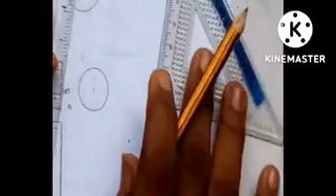So good. Now the next thing to do is to make use of the set squares. Okay, or let's just use the normal method: up and down, up, left and right, top, bottom, right, left. So now we'll join these divisions.

We join them. It's not necessary, as I mentioned in the previous episode, but it is good, so you can know where you're coming from and where you're going. And it also assures you of your accuracy, because once they pass through the center, you will know that it is correct.

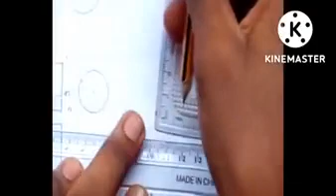The next thing to do is to draw the front elevation. So I'll be drawing the front elevation now. This is how the front elevation looks. So the front elevation will actually also look like a rectangle, even for the development of an untruncated cylinder.

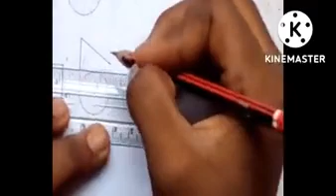So this will be the top. In this case we have truncated it, right? So it will no longer be a rectangle. So let me truncate from this point to this point. Instead of starting from the top, let's start from a point that is not at the top, so that you know that it doesn't have to be from the top. But once it's not at the top, you have a new top. So this was the original top, but we didn't pass through that side. So let me draw the other points.

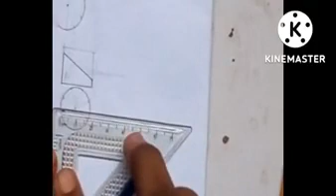This was the original cylinder, but when you truncated it from this side to this side, you have a new cylinder. The next thing to do is to project your lines. So project the lines on the section on the plan to the top. We have here. We have them here finally.

So we'll now project these lines to the right. They will be the ones used for the development of the truncated cylinder. There we go. So this is the center line. Now this might look like a very tiny drawing, but I intentionally made it tiny so that it would fit into this part.

Now the next thing to do is to cut your divisions. So you are going to mark the divisions. You can say mark, you can also say cut, either one. So I'm going to mark the divisions from the plan onto the development. So let me start.

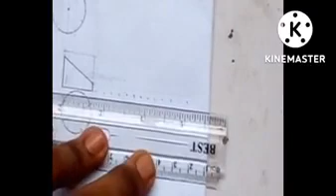The next thing to do is to draw a vertical line that will correspond with the height of each of these points. So they are kind of the sections of the front elevation. So basically this procedure is just the process of dividing the front elevation into sections and then drawing the shape of each of those sections. The reason is that when you draw the shape of the smaller sections, you will be able to get the aggregate shape of the entire development. Because you can't get it all at once, you have to divide the section.

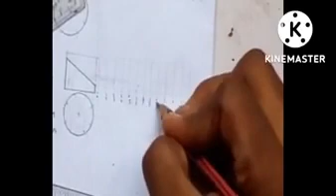So now from this section, let's call it 1, 2, 3, 4, 5, 6, 7, 8, 9, 10, 11, 12, and then back to number 1. So let's name them here: 1, 2, 3, 4, 5, 6, 7, 8, 9, 10, 11, 12, back to 1. Now from 1 to 2, at number 1 we have the height here, so point it here. At number 2, we have the height at this level, so we'll transfer it and then point it at number 2.

At number 3 on the plan, we have the height at this level, we'll transfer it to number 3 on the development. At number 4, we have the height at this level, we'll transfer it to number 4. At number 5, we'll transfer it to number 5. At number 6, we'll transfer it to number 6. Then at number 7, we have it at the lowest level of the truncation. 7, good. Then number 8.

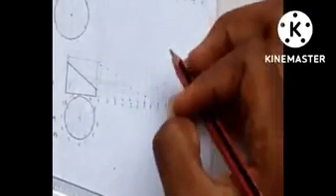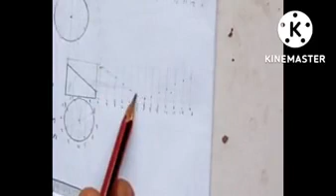So you can see that this pattern also repeats. So instead of stressing yourself, you can just copy the pattern from each dot to the other. And finally, we get back to 1. The next thing for you to do is to join all these points with your French curve. I'll first line it with my hand, that's my practice. I always draw a faint line through all these points with your pencil, freestyle.

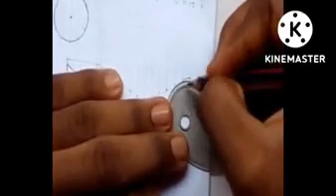Then after you're done with that, you can now use your French curve to line everything in. This is not a very difficult one because these ones are actually small. But just line smaller sections first. So that's what I'm doing here. I have this one here. This one here. Then let's draw the middle section, the connection.

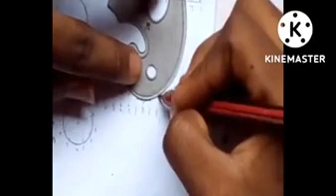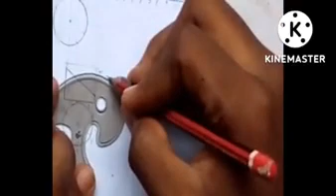Then we have this. We have this here. Then we have this here. We have this here. There is actually a trick involved in this though. I discovered that when you draw up and down sides of the French curve, it gives a smooth curve. But we'll talk about that in another episode. Let's just focus on the development.

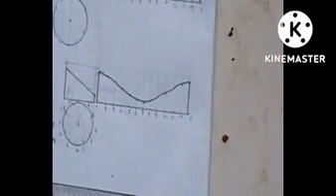Now this is how it looks when you develop it. It no longer looks like a rectangle as in the case of a full cylinder. Let's compare this with the previous episode. In this episode, I'm developing the truncation of a cylinder, but in the previous episode, I was developing the whole cylinder. You can see the difference. In the first case, you have a complete rectangle. But in this case, because you truncated this side, you now have an incomplete rectangle as the development.